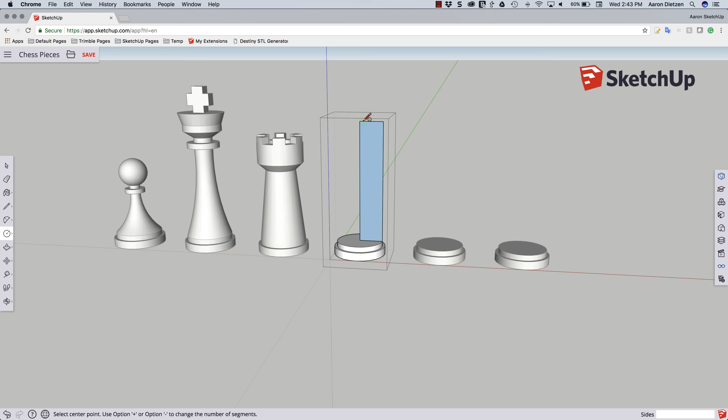Generally speaking, a bishop has a little circle on the top, so I'm going to use the circle command, hit C, and drag a line down, something like that. That's about as precise as we need to be right now. We're sculpting, we're not drawing architecture at this point.

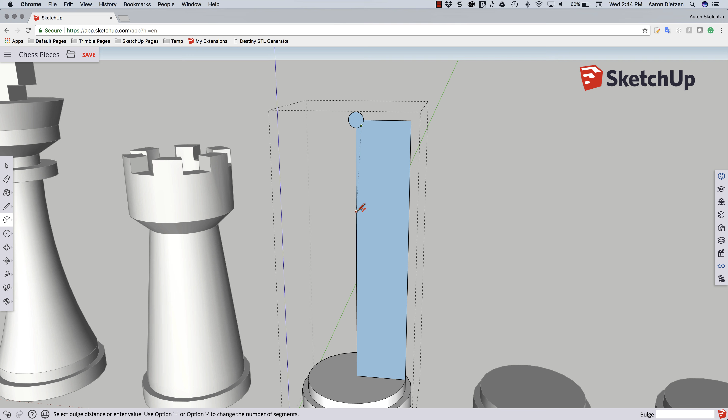Now I'm going to grab an arc. The distinguishing feature of a bishop is that kind of egg-shaped head. So I'm going to click on an endpoint in the circle, then click on a point in the center line and just kind of pull out until I feel good. That's right there, seems like that's about perfect.

I'm going to switch back to lines by hitting L, and I'm going to put the collar on here, just like I have on my other human-esque pieces. I'll drag that over, and then one last arc is going to go from here down to here and pull in like that. That looks pretty good, a little bit of cleanup.

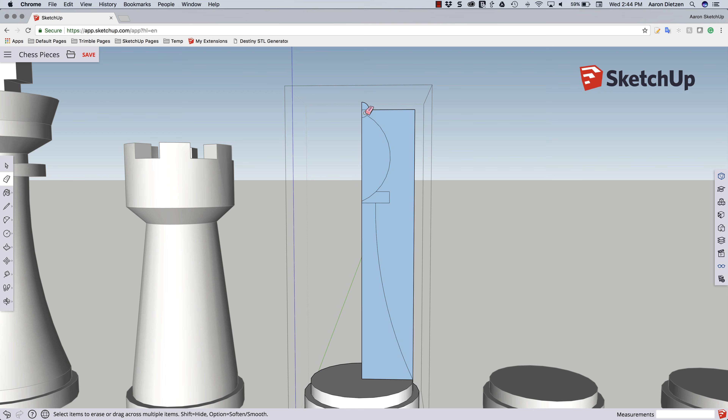I don't need these extra lines. I do have to make sure to come in and draw a line from this point up so that I bisect that circle, so when I erase I can get rid of that half. Then I can clean up the rest of these interior lines, get my profile, get rid of these extra edges, and then, like we've done three times before, I'm going to use follow me. I'll select the path, then select follow me, select the profile, and there we go.

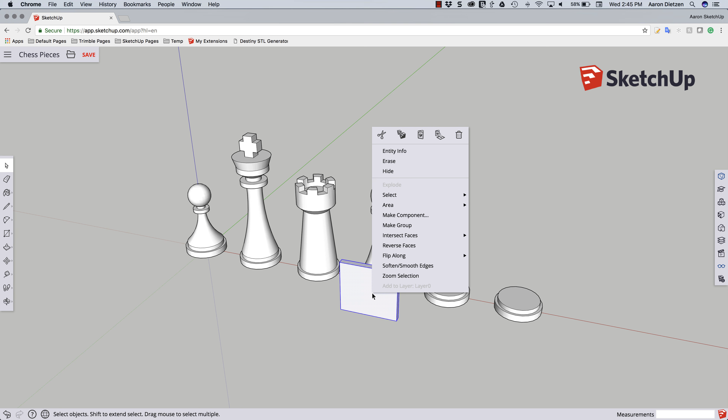That's pretty close to what a bishop looks like, but if you've seen a bishop, it has this weird cut down into the egg shape. So we're going to leave the group and create some reference planes. I'm going to start by drawing a rectangle, a long, skinny rectangle like that, pull that up, triple click, right click, and make that a group. This is the solid I'm going to use to make a cut into this egg shape.

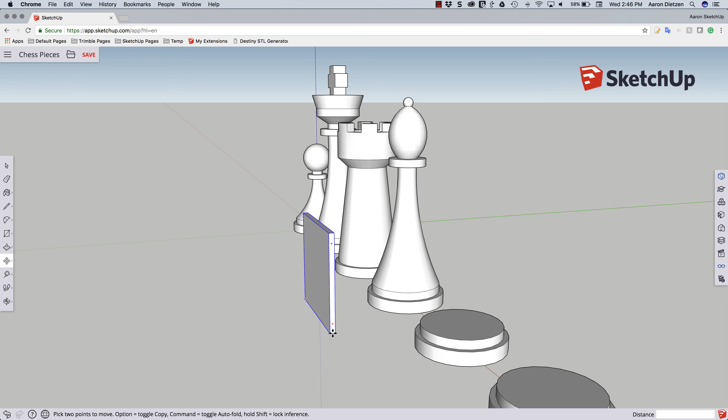That's actually a little too big, so I'm going to make it a little thinner, something like that. That works good. I'm going to use the move command to move this straight up, just going vertical. Then I'll click again and move it back along the green axis till it intersects the face.

All right, that's about perfect. This is why I made this so big, I didn't want to have to line it up exactly, didn't want exactly the width of the piece or anything like that. I want it big because I just want to lap into it.

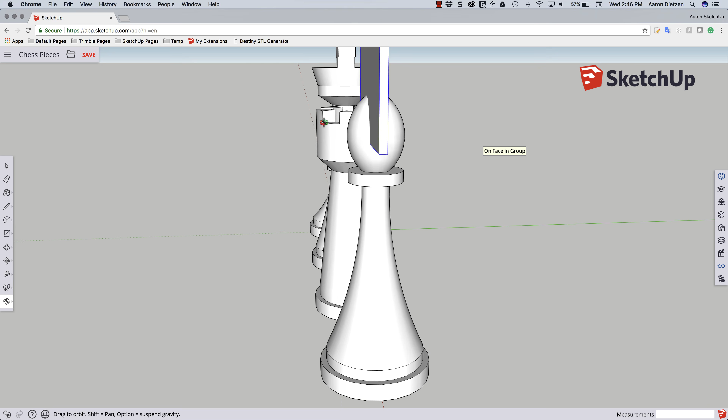Now I'm going to take it and use the rotate command. I'll come over here, click rotate, and rotate along the red, right from the corner, and just kind of tip it forward a little bit, something like that.

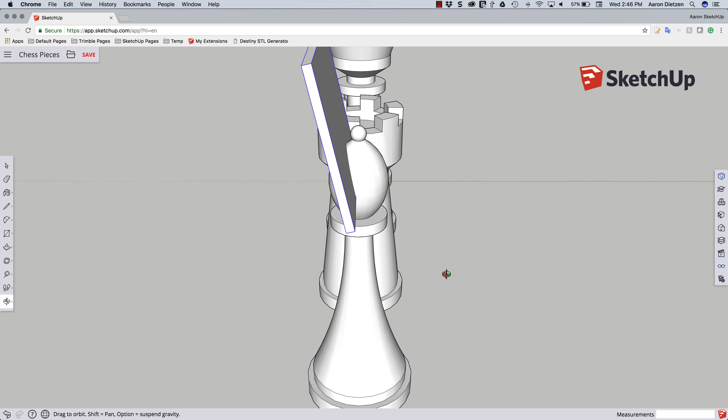So I'm in SketchUp Free, so I don't have access to solid tools. What I do have access to is intersect with model. So I can double click on this piece right here, select the egg-shaped top, right click, and say intersect faces with model. Now any place that this surface intersects anything else in the model, it gets broken.

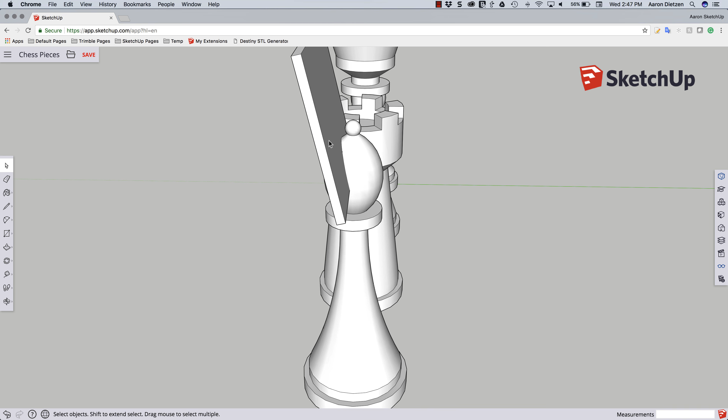So what does that mean? I'll come out here and delete this, I only needed it for a little bit. And that's what it did, it came in and made a cut. If I double click and go back in here, I can select this surface and delete it, and that's the cut it made.

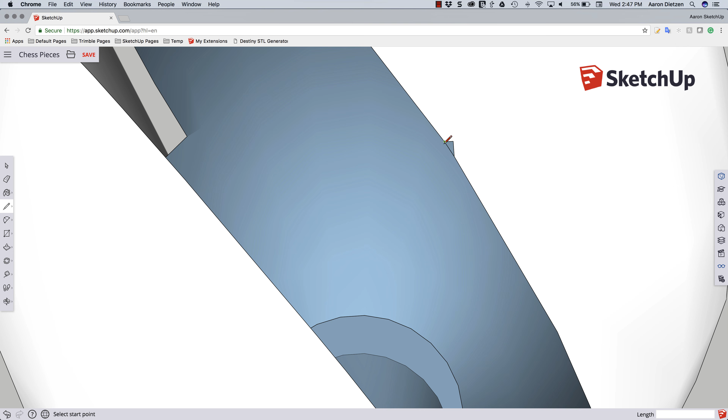You can see it did have a problem making some of this geometry. This geometry is incredibly small, but fortunately it's pretty easy to heal up. If I just turn on my line and trace the edge, it disappears. So it looks like I have four spots where the intersecting geometry made something too tiny, but not a big deal, a couple clicks is all it takes to get that cleaned up.

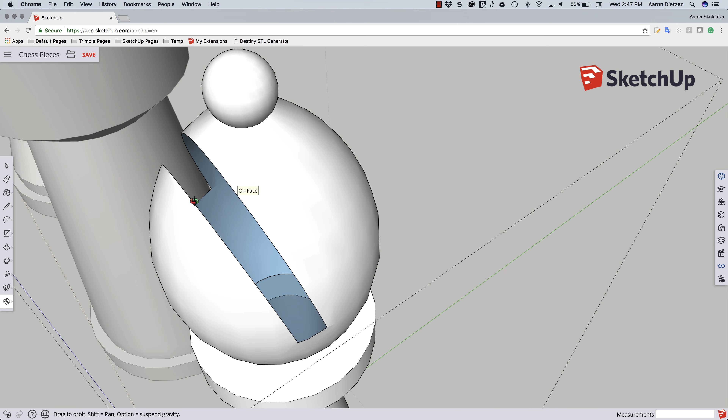Last thing I have to do here: I've got an issue, I can't 3D print this, it's hollow right now. So I'm going to have to draw a couple lines which will close off that interior geometry. Two lines is all it takes, corner to corner, corner to corner, and that closes in that geometry. If I back out now, go to select, pick that again, I can use my entity info to see that that is a solid group, thus 3D printable.

So that concludes our fourth piece of the chess set. Our bishop is done. Up next, we'll take a look at the queen. Thank you.